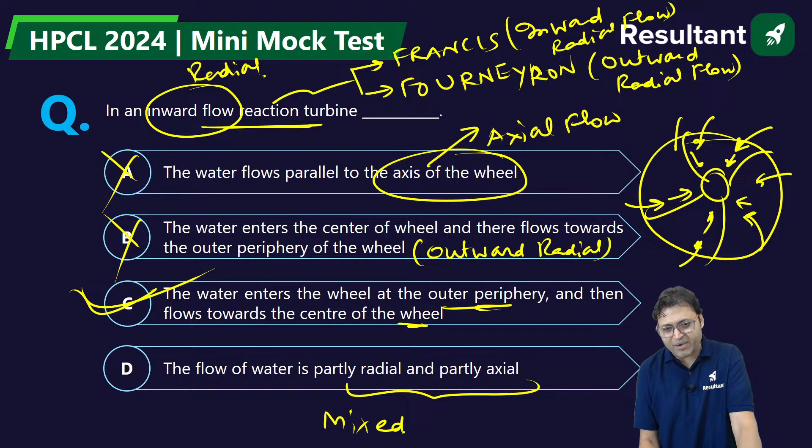Option D says the flow of water is partially radial and partially axial, which is called mixed flow turbine. When the flow is partially radial and partially axial, it is known as mixed flow. Yes, C is the correct answer.

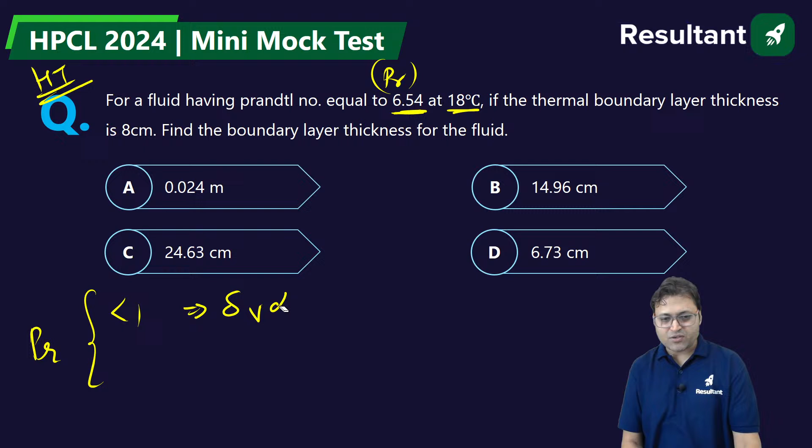Based on the value of Prandtl number, whether it is greater than, less than, or equal to 1, there are three possibilities. If Prandtl number is less than 1, delta V is less than delta T, meaning velocity boundary layer thickness is less than thermal boundary layer thickness. If equal to 1, velocity boundary layer equals thermal boundary layer thickness. If greater than 1, velocity boundary layer thickness is greater than thermal boundary layer thickness.

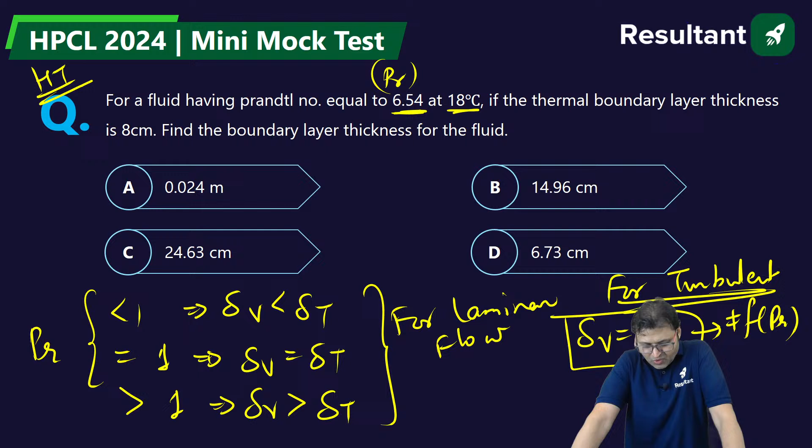These relations are for laminar flow. For turbulent flow, delta V is always equal to delta T irrespective of Prandtl number, not a function of Prandtl number. If the flow is turbulent, it does not matter whether the Prandtl number is less than, equal to, or greater than 1.

Prandtl number is a property of the fluid. So can you let me know what will be the velocity boundary layer thickness for the fluid? We can say delta V by delta T is equal to Prandtl number to the power 1 by 3.

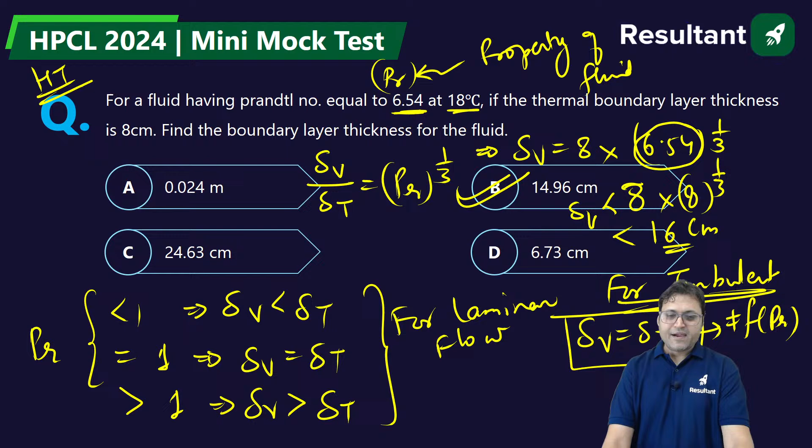The next one is theoretical. In a reaction turbine, the draft tube is used. Why do we use the draft tube? The draft tube is used only in the reaction turbine. The impulse turbine does not have a draft tube, it is not required for the impulse turbine to have a draft tube.

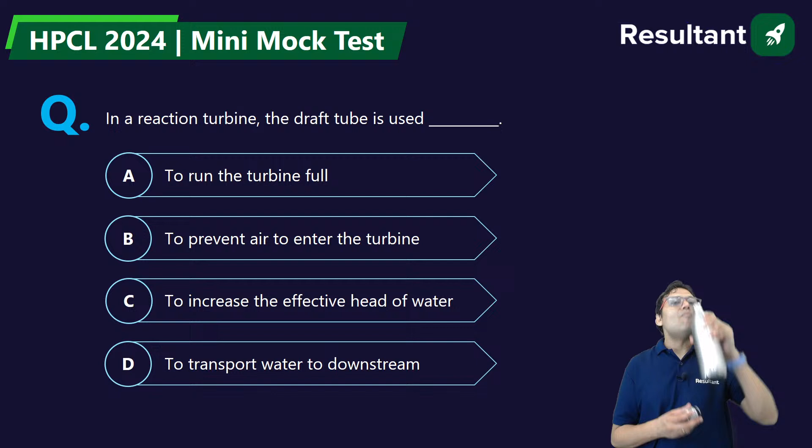Draft tube is used to recover the pressure. The pressure at the reaction turbine outlet is very low because pressure energy gets converted into mechanical energy. So there is a huge drop in pressure at the outlet of the reaction turbine, and that is the reason there are chances of cavitation there. To recover that pressure, draft tube is a diffuser passage attached to the outlet of the reaction turbine. In a diffuser passage, area is continuously increasing, so velocity decreases and pressure increases. So pressure at the end of the diffuser passage, or the draft tube, is higher.

So what is the correct answer? Is it used to run the turbine full? No. Is it used to prevent air from entering the turbine? No. Is it used to increase the effective head of water?

By use of the draft tube, the available head is utilized more efficiently. It increases the available head, H, to increase the efficiency. Yes, option C will be the correct answer.

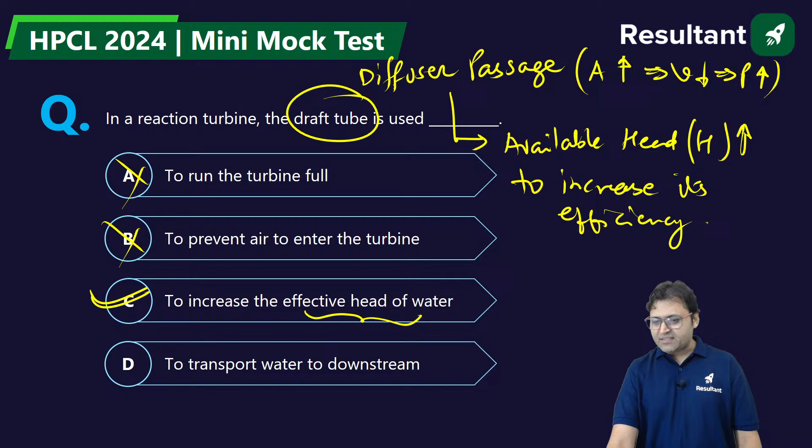Well done, well done. Good, good, Vaibhav. Shreyas, good. Keep it up, guys. Keep your momentum, keep your energy.

Keep your motivation high. The next one is the ratio of kinematic viscosity to thermal diffusivity. Very simple. What is that dimensionless number called? Unit of kinematic viscosity is meter square per second, and unit of thermal diffusivity is also meter square per second, so the ratio is a dimensionless number.

What is that? If we talk about the Grashof number, used in natural convection or free convection, the ratio of buoyant force to viscous force is the Grashof number. If we talk about Mach number, used in fluid mechanics, it is the ratio of inertia force to elastic force, under root of that, or we can say V by C.

Nusselt number is the ratio of conductive thermal resistance to convective resistance for the fluid, because fluid has conduction also, convection also. There is conduction in the fluid in the no-slip region.

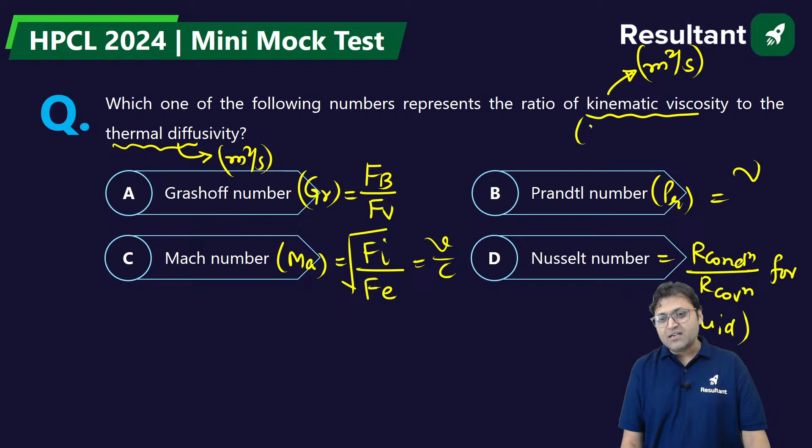It is the Prandtl number, which is the ratio of kinematic viscosity to thermal diffusivity. Kinematic viscosity is also known as momentum diffusivity. So the ratio of kinematic viscosity to thermal diffusivity is the Prandtl number. It is the property - this dimensionless number is the property. So option B is the correct answer.

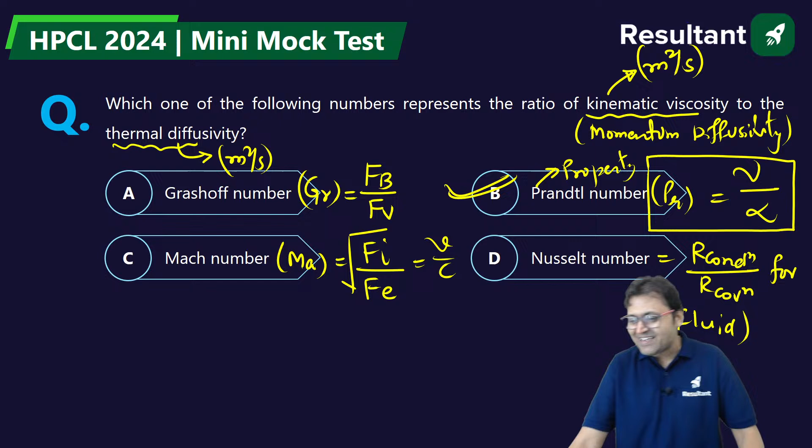Let us move to the next one. Next question is on your screen. Read it carefully, very beautiful question. There might be slight calculation in the question, so you should be able to deal with the calculation.

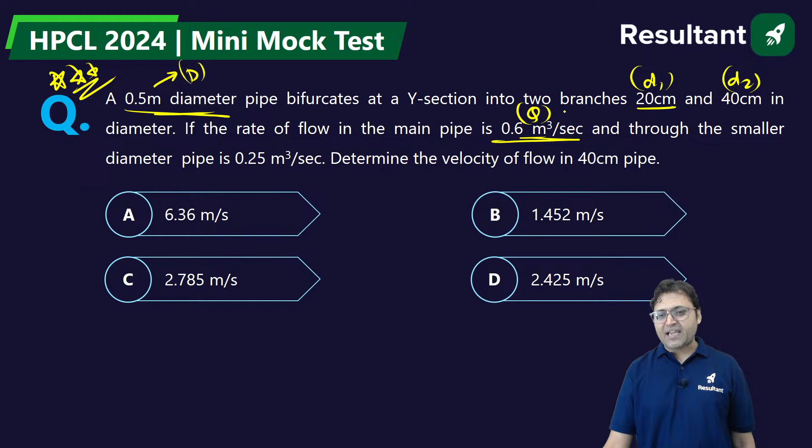There is a 0.5 meter diameter pipe which bifurcates at a Y section into two branches. This is the main branch, let me call it D as the diameter, and there are two branches where D1 is 20 centimeter and D2 is 40 centimeter in diameter. If the flow rate of water in the main pipe is 0.6 meter cube per second, and through the smaller diameter pipe D1, Q1 is 0.25, then what is the velocity of flow in the bigger pipe?

So we need to find out V2. Can you solve it? Yes.

There is an original pipe which is bifurcating, so Q is equal to Q1 plus Q2 according to the continuity equation. So Q2 will come out to be Q minus Q1. Q is 0.6 minus 0.25, so it will be 0.35.

So Q2 is equal to pi into R2 square into V2. We need to find out V2, so V2 is equal to Q2, 0.35, divided by 22 by 7 into R2 square. What is R2? D2 is 40 centimeter, so R2 is 20 centimeter, and 0.2 square. Can you solve it?

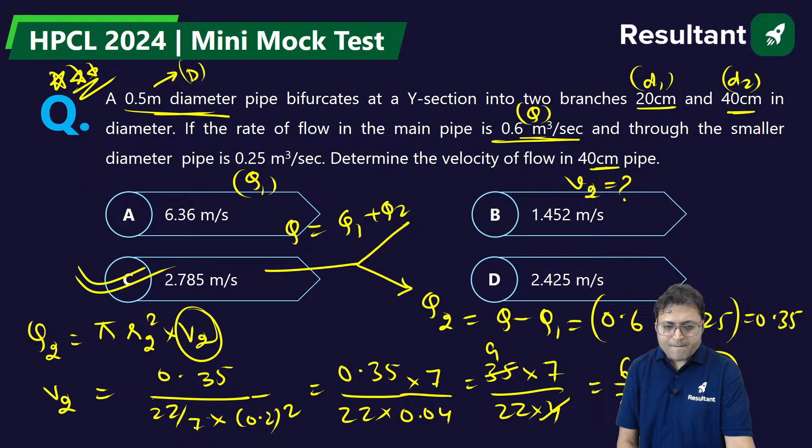2.785. Is this clear? The next one, from the heat transfer,

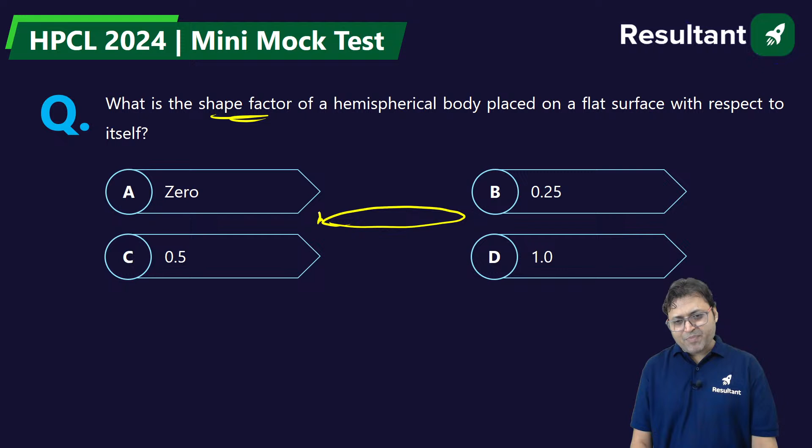What is the shape factor of a hemispherical body which is placed on a flat surface with respect to itself? Yes, can you solve it? There is a flat surface and there is a spherical body like this. We need to find out the shape factor of the spherical body. This is the spherical surface, shape factor of the spherical surface. Let me call it as surface 1. This is, let us say, surface 2. So we need to find out F11. Can we say F11 plus F12 is equal to 1, and F21 plus F22 is also equal to 1 from the enclosure theorem, and 2 is a flat surface.

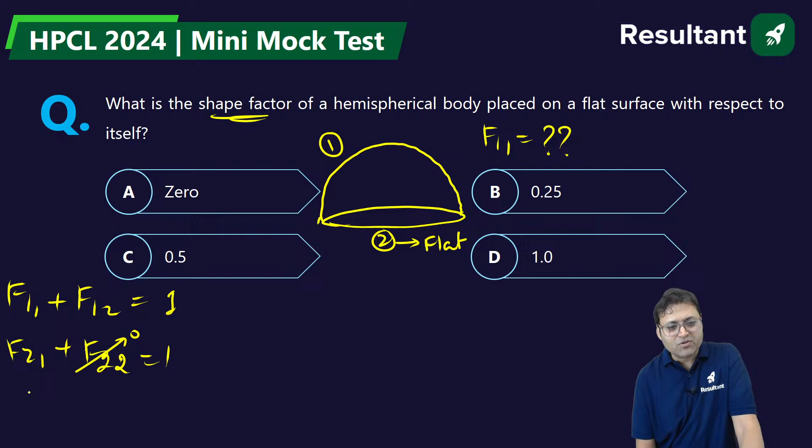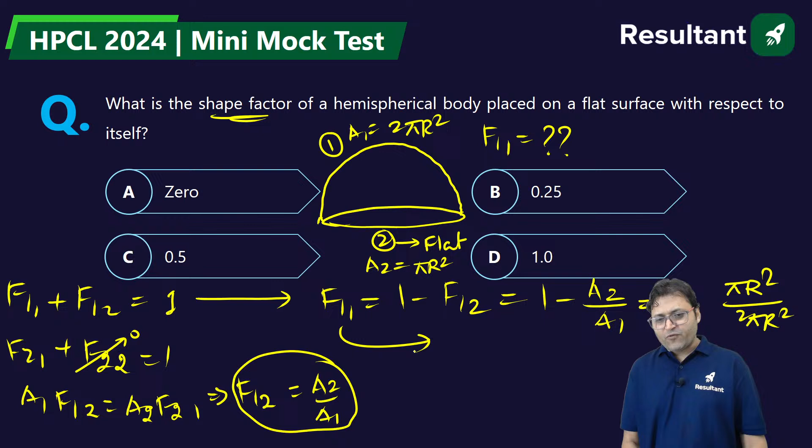For the flat surface, self shape factor is 0, and A1 F12 is equal to A2 F21. So from here we can say F12 is equal to A2 by A1. So F11 is equal to 1 minus F12, that is 1 minus A2 by A1. What is the value of A1? A1 is equal to 2 pi r square. What is the value of A2? A2 is equal to pi r square. So it is 1 minus, sorry, A2 is pi r square, pi r square by 2 pi r square. So the answer for F11 is equal to 1 minus 1 by 2, that is equal to 0.5. That has nothing to do with the radius, it is independent of radius. 0.5 will be the self shape factor of hemispherical cavity. 0.5 is a constant value, it is a fixed value for all the hemispherical cavity.

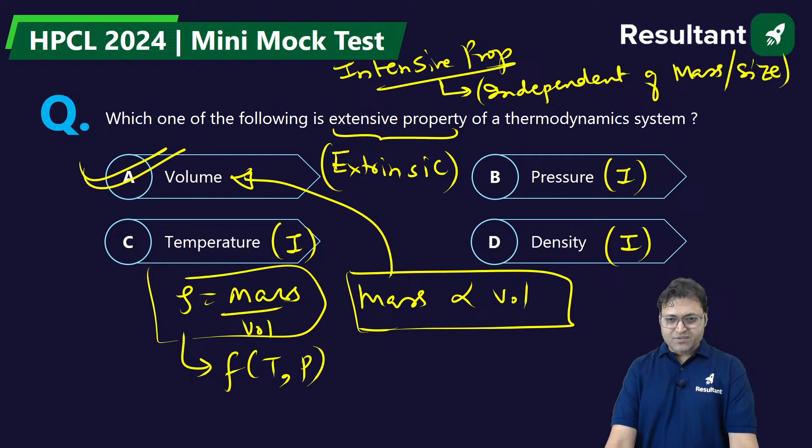So it is volume. Energy, all type of energy are extensive property. Kinetic energy half mv square, potential energy mgh depends on mass. All type of energy are extensive properties. So volume and energy are extensive. Pressure, density, temperature, these are all intensive properties, right?

Now the next one. Who will be going to solve the next one? Everybody, please give it a try.

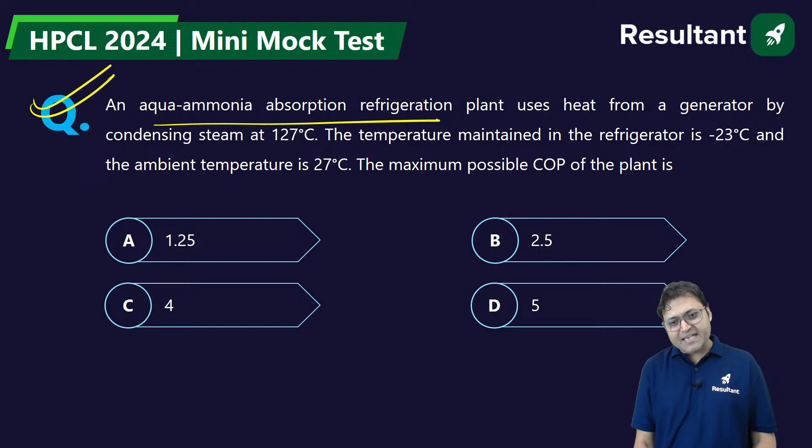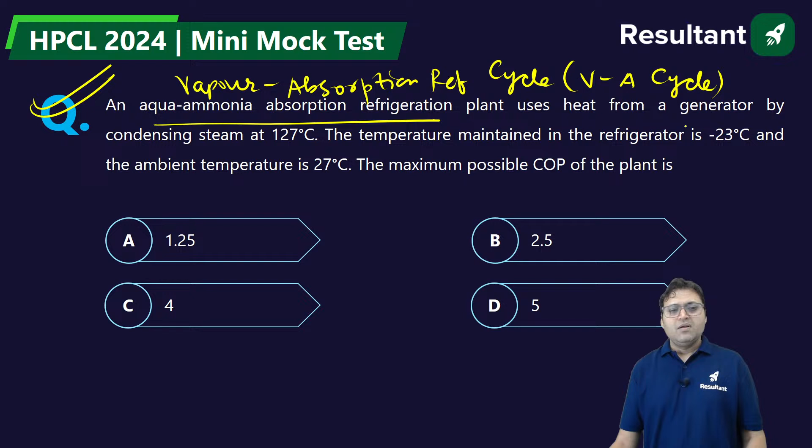So water and ammonia are used in the vapor absorption.

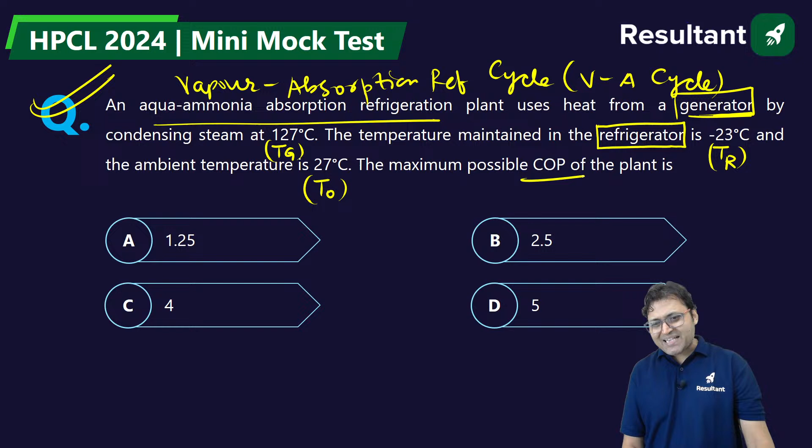The temperature maintained in the refrigerator, that is the storage space, is minus 23 degrees Celsius, that is the temperature of the refrigerator or the storage space. And the ambient temperature, outside temperature, is 27 degrees Celsius. What is the maximum possible COP? Do you guys remember the formula? Please raise your hand. If you remember the formula for maximum COP, that is TG minus T naught upon TG.

TG is the generator temperature minus T naught. T naught is the ambient temperature, upon TG into refrigerator temperature upon T naught minus TR. So if temperature of generator is more than ambient temperature, which is more than refrigerator temperature, this is the formula for maximum COP of this VA cycle.

If you put the values, let us try to solve it. Generator temperature is 127, minus ambient temperature is 27. No need to convert it into Kelvin as long as we are calculating the difference of the temperature, and divide by TG. Now you have to convert it into Kelvin. This is one bracket multiplied by TR. What is TR? Minus 23 plus 273. Divide by T naught, that is 27 minus TR minus 23. This will give you the final answer.

Yes, 127 minus 27 is 100, divide by 127 plus 273, that is 400, 1 by 4, multiplied by 273 minus 23, that is 250, divide by 27 plus 23, it will become 27 plus 23, so that is 50. So it is 5 by 4. So maximum COP is equal to 5 by 4, or 1.25.

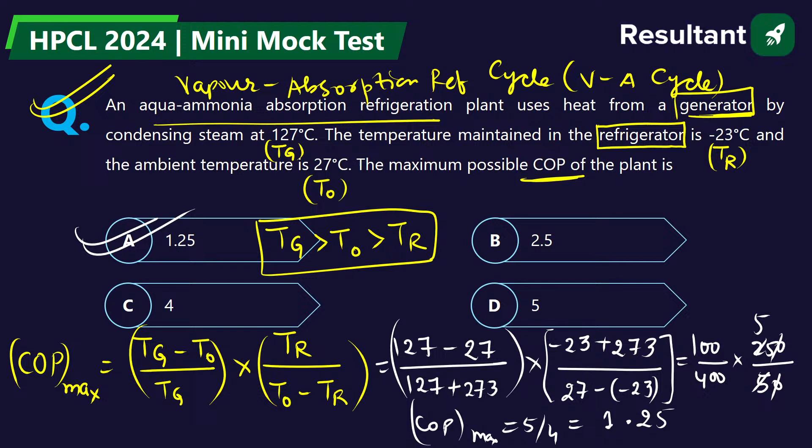What is 5 by 4? 1.25. It is 1.25, which is correct. The answer will be 1.25. 1.25 will be the correct answer.

Let us move further. Simple question, theoretical question. What is the answer to this one? The next one, is the previous question clear to everyone? That is formula based, if you remember the formula, you can do it.

HPCL is going to ask very simple formula based questions only. So there is a need to revise all the concepts, all the subjects thoroughly before appearing for your HPCL exam. There are two types of heat. One is sensible heat, another is latent heat.

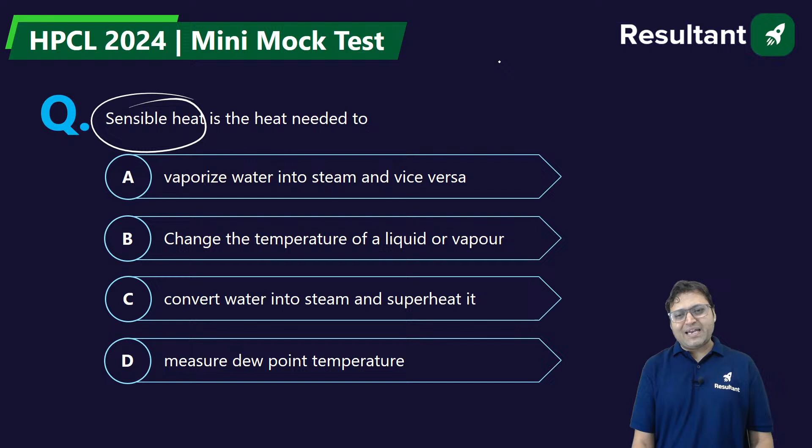Latent heat is related to the phase change. The heat required for causing a phase change at constant temperature, that is called latent heat - latent heat of fusion, latent heat of vaporization, latent heat of sublimation. What is sensible heat? It vaporizes water into steam and vice versa - that is not correct. Why? Because that is the latent heat. Phase change is associated with the latent heat, right?

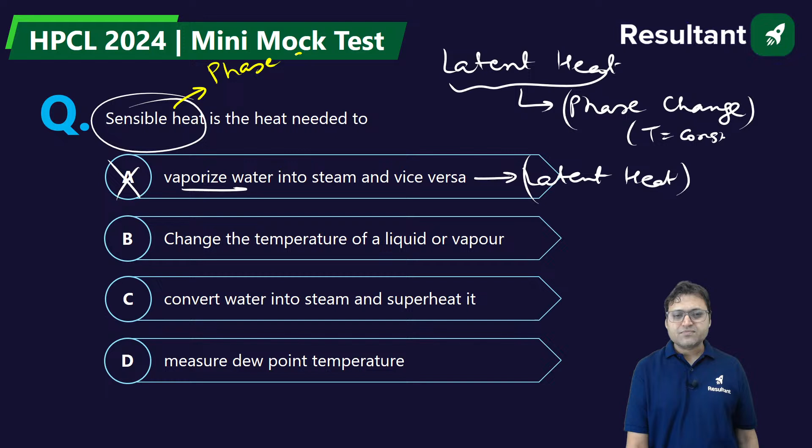Sensible heat changes the temperature of the liquid or vapor. Yes, phase change takes place at a constant temperature. So when latent heat is used, the temperature remains constant; with sensible heat, the phase remains the same and temperature changes. Whenever we provide sensible heat, if there is no change in phase but the temperature changes, then it is known as sensible heat.

So it gives rise to change in temperature of the liquid or vapor without any change in phase. Convert water into steam and superheat it? No, that is also phase change. Water into steam - converting water into steam is latent heat, and steam into superheating is sensible heat. It is a combination of latent heat and sensible heat. Measure dew point temperature? It does not measure dew point temperature.

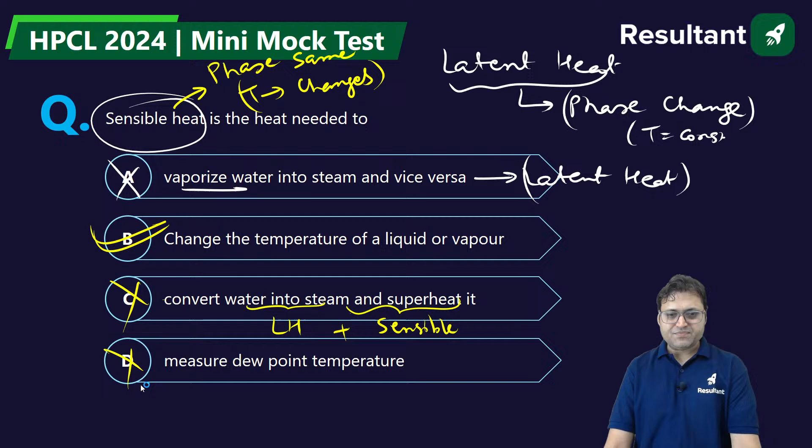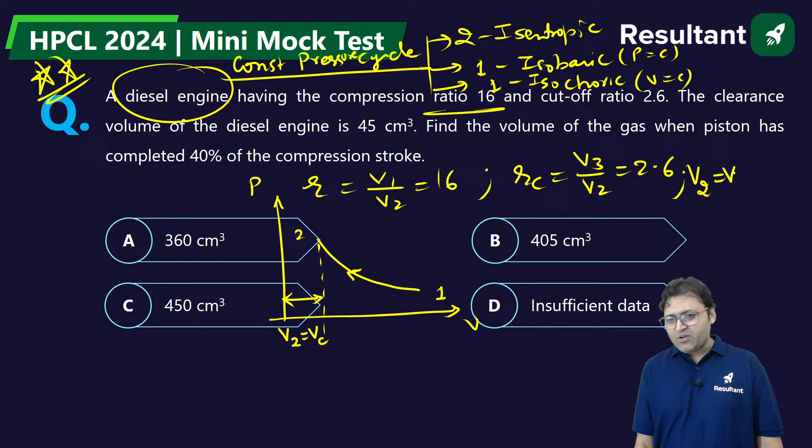If I show you the PV curve for the compression - this is pressure, this is volume, this is 1, this is 2. 1 to 2 is isentropic compression. So this V2 is the clearance volume, we can call it V2 or VC. So V2 is equal to VC is 45 centimeter cube. Clearance volume is 45 centimeter cube, right? Find the volume of the gas when the piston has completed 40% of the compression stroke.

Find the compression ratio. So when 40%, sorry, compression stroke - this is one stroke. Find the volume of the gas. So when it has completed 40%, like this, this is 40%. This is the swept volume Vs, that is equal to V1 minus V2.

Swept volume is V1 minus V2. So this is 0.4 Vs. We need to find out V1 dash, that is the question. This is equal to 0.6 Vs, yes or no? If it has completed 40% of the compression stroke, the remaining is 60% of the compression stroke. So what is the volume corresponding to 40% completion of the compression stroke? V1 dash needs to be calculated.

Can you find out? Can we say V1 dash is equal to V2 plus 0.6 Vs? Yes or no? And what is Vs? Vs is equal to V1 minus V2. So Vs is equal to, what is V1? From here we can say Vs is equal to 16 V2 minus V2, that is 15 V2. And what is V2? So 15 into 45 is Vs, yes or no?

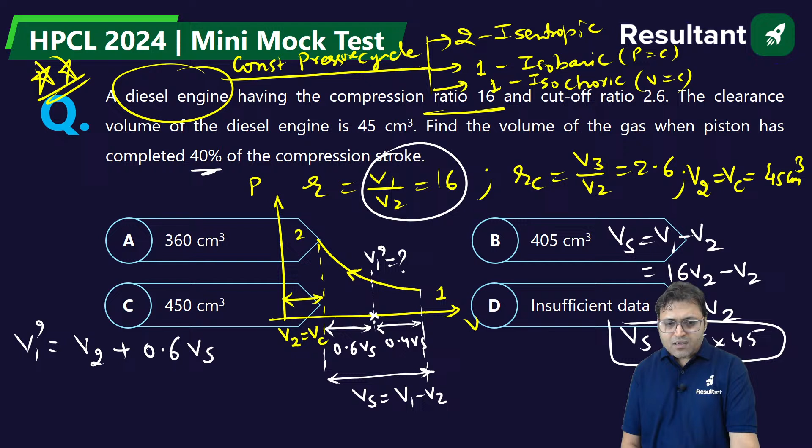Or what you could have done is, you could have written R, the compression ratio, is V1 by V2. What is V1? V1 is equal to V2 plus Vs, upon V2, or V2 is Vc actually, that is equal to 16. So 1 plus Vs by V2, what is V2? 45, is equal to 16.

So from here we can find out Vs. So it will be 15 into 45. Yes, it is 15 into 45. So 15 into 45 is equal to, Vs is equal to 675, isn't it? It is 675 centimeter cube.

So put the values. V1 dash is equal to V2. V2 is 45 plus 0.6 into 675 will give you the answer for volume at 40% of the compression stroke. Can you solve it? Are you guys getting 450 or not? Please do let me know if you are getting 450 or not, everybody. Yes, is this clear to everyone?

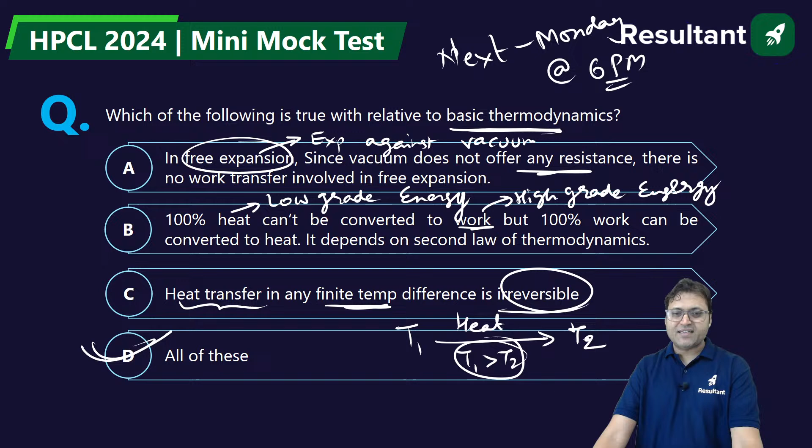So option D will be the correct answer for this one. Option D is the right answer. I hope this is clear.

The exact statement is, Kelvin Planck gave the statement for the second law of thermodynamics that gives the concept of heat engine. What Kelvin Planck said is it is impossible to construct a cyclic device which exchanges heat only with a single reservoir.

It means W is always less than Q. Thermal efficiency cannot be 100%. So there has to be another reservoir where the remaining heat must be thrown. So complete conversion of heat into work is impossible. That is what the Kelvin Planck statement says.